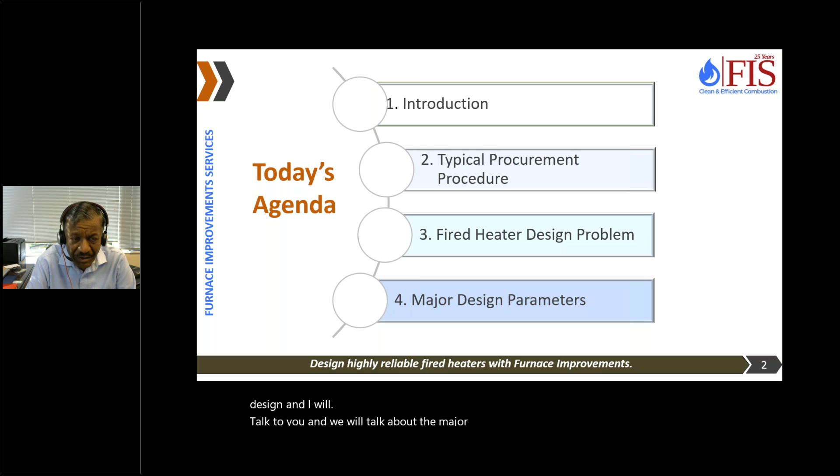So what are we going to be doing today is talk a little bit about introduction, talk about typical heater procurement procedure, and then we will talk about a real fired heater design problem. We will take a real fired heater design, and I will talk to you about the major design parameters, and then we will move ahead with that design, how we come up with the design of the heater.

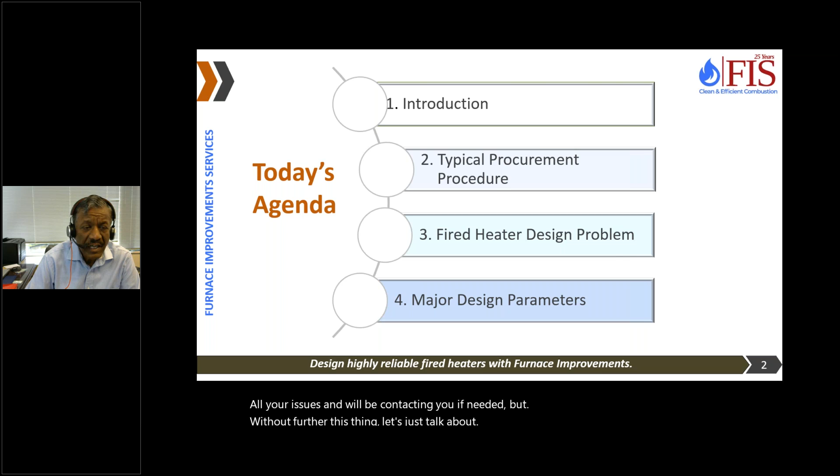Without further delay, let's just talk about how the heaters are being procured today in most part of US and the world. So typically, when you have a project, most of the projects are carried out by big EPCs, engineering companies, and they sometimes hire licensors, and they come out with a front-end engineering design package, feed, typically, as it is known in the industry. And that is given to the EPC, the successful EPC, and they are asked to develop a plus minus 10% cost estimate.

So the EPCs take the data sheets which are developed by the licensors or the client, or by EPC themselves, and they go out to the heater vendors and get the preliminary cost estimates. And these cost estimates are then taken by the EPCs to develop the project estimate. And once the project is approved, EPCs take those proposals, firm up their inquiries, and send the firm inquiries back to the heater vendors.

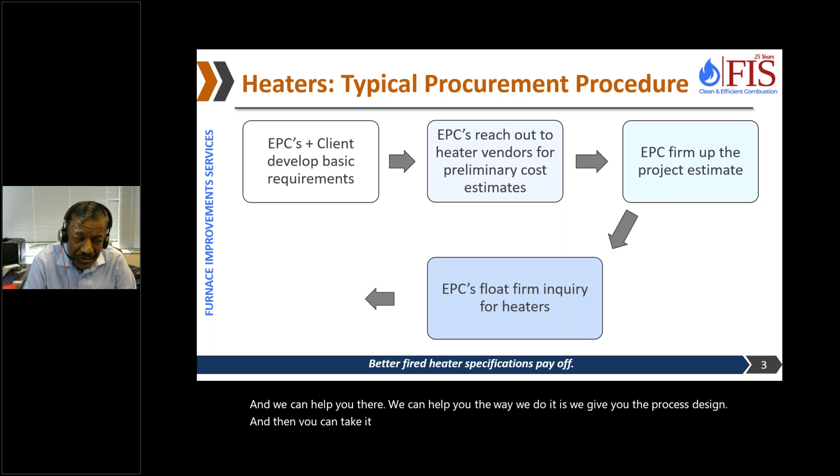So our approach is get the design right the first time. Do it once, do it right. That's our approach. And we can help you there. The way we do it is we give you the process design, and then you can take it to any EPC or any heater company, and it will ensure that you don't get a cheap heater. You get the best heater for your money actually.

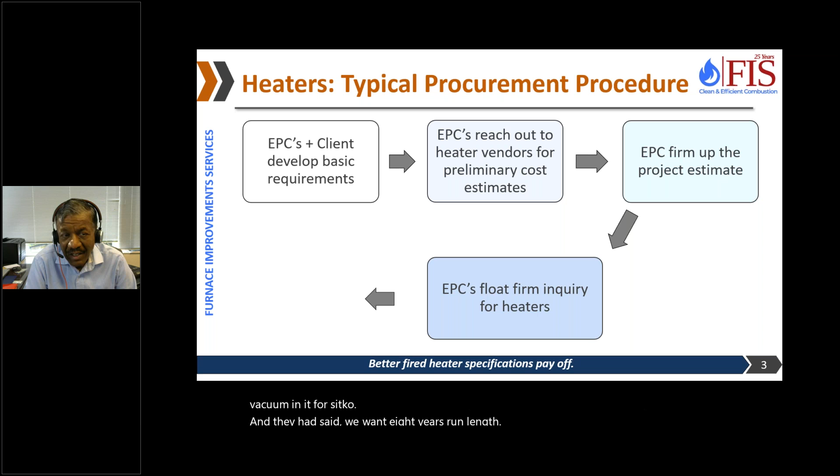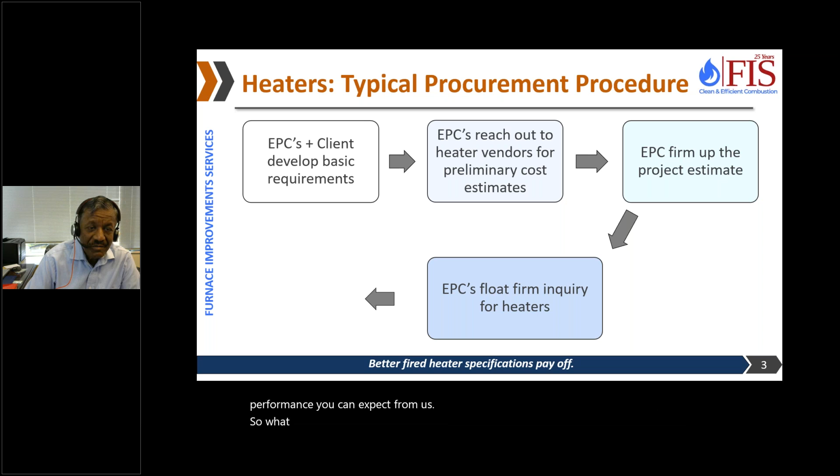We did a design for crude and vacuum unit for Citgo, and they had said we want 8 years run length, and we were able to show them that the heaters ran for 8 years. So that's the type of performance you can expect from us. So what I feel is the procurement procedure needs improvement, and that's where we come in.

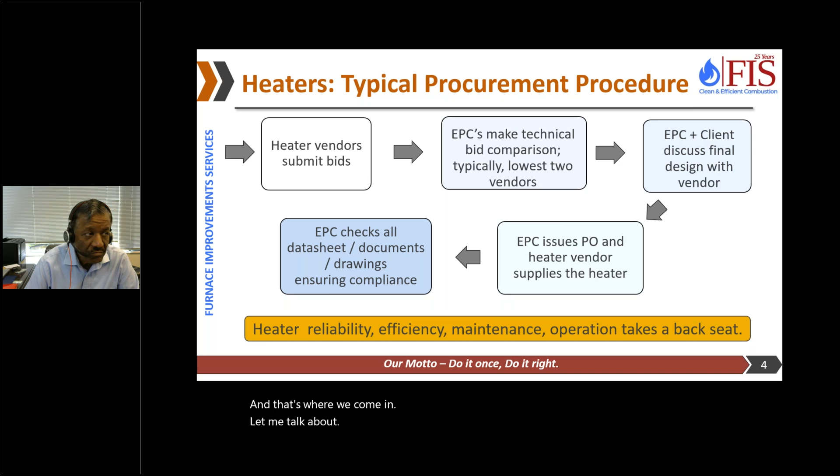So let me talk about our company, Furnace Improvements. We started in 1996. We have two offices, Sugarland, Texas, and then we have a main office in Noida. Now, basically, the main office is where all the activities are taken care of. Our mission has been improving the performance of existing fired heaters. That's what we do for living. Basically, take your heater, improve their run length, improve the capacity, improve the efficiency, reduce emissions.

And our model has been working directly with end users and owners, as we call it. It's a model which is like a patient-doctor's relationship. We look at the patient and then we prescribe the medicine. And we have a very unique value-added approach, and it is somewhat based on a contrarian approach.

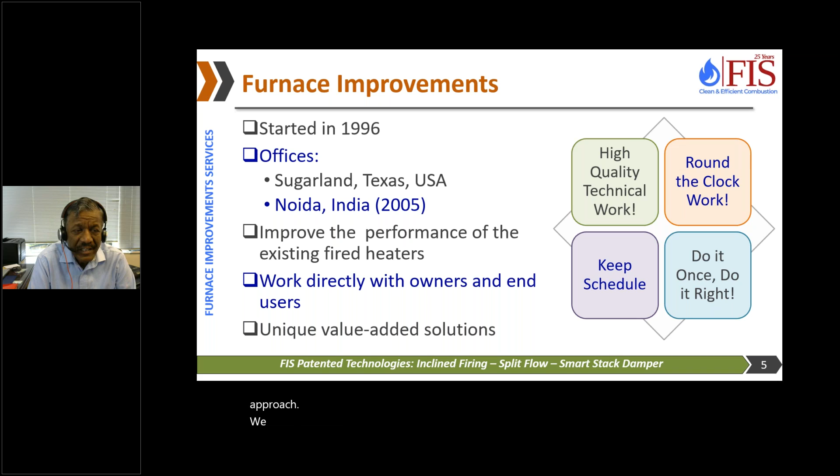We challenge what has been done and why it has been done. So we have a kind of getting back to the basics and looking at the heater. If you give us a heater, we will look at the basics and see what has gone wrong in that heater. And on that basis we have developed 3 patented technologies: inclined firing, split flow, and smart stack damper.

So that's basically our approach to fired heaters. And as I said, our approach is do it once, do it right. Because of time difference, we are able to do work around the clock, and we are able to keep schedules. We can do work schedules very, very fast.

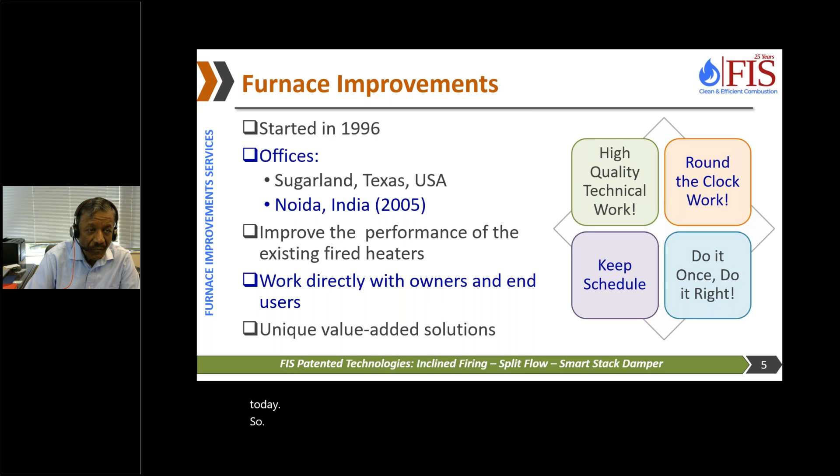As far as our capabilities are concerned, our forte is process engineering. We have in-house CFD modeling capabilities. I think maybe we are the only heater company with in-house CFD modeling capability. We do our mechanical engineering, structural design. We have SolidWorks for 3D modeling, and we can do your project from start to finish, all the way from design to erection. We can take the project.

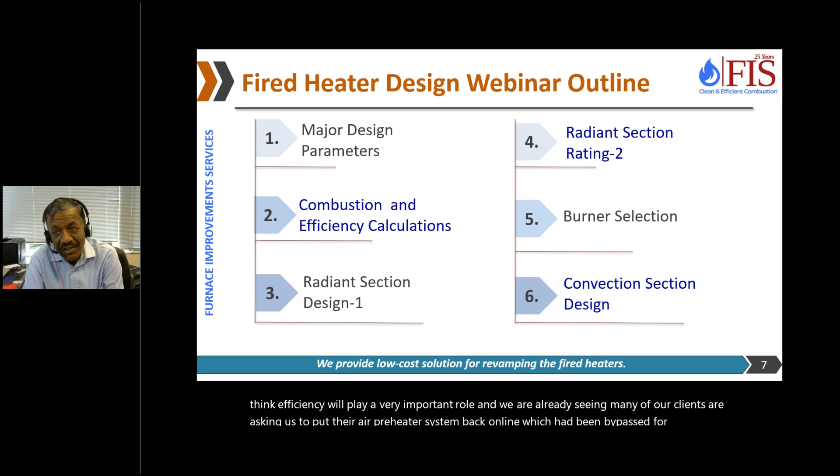Then in the third and fourth sessions, we will talk about the radiant section. We realized the radiant section is the key to fired heater design, or the major component in the fired heater. So we will take 2 sessions doing that.

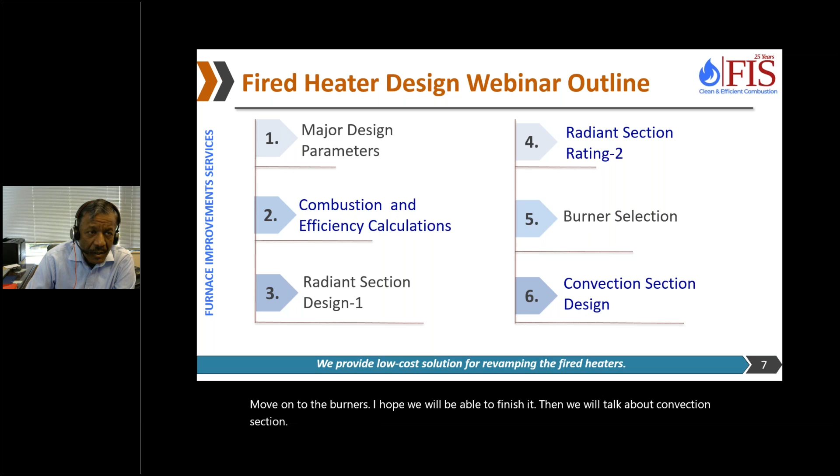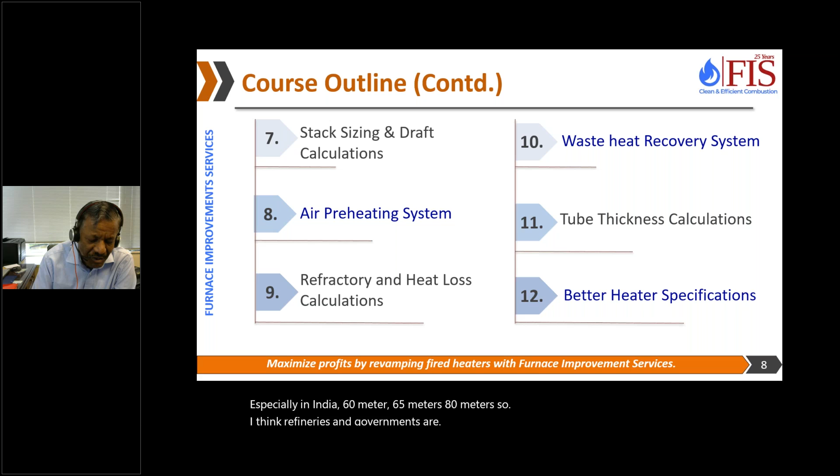Move on to the burners. I hope we will be able to finish it. Then we will talk about the convection section. Move on to stack sizing and draft calculation for stacks. We are seeing taller and taller stacks, especially in India, 60 meters, 65 meters, 80 meters. So I think refineries and governments are taking cognizance of pollution, and that's a good thing. The taller the stack, the lower will be the ground level concentration.

Air preheating systems are going to make a big comeback because that's one of the most effective ways of improving efficiency. So we will talk about air preheating systems. We will talk about refractory and heat loss calculations. We'll talk about waste heat recovery systems, also like steam generation and tube thickness calculations.

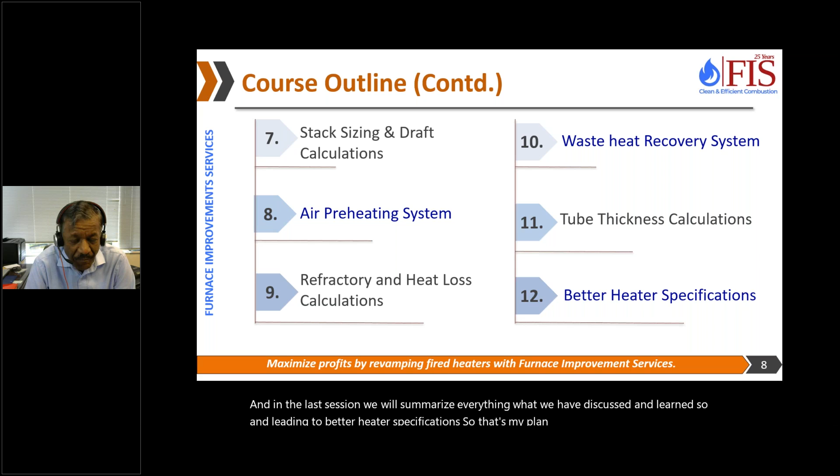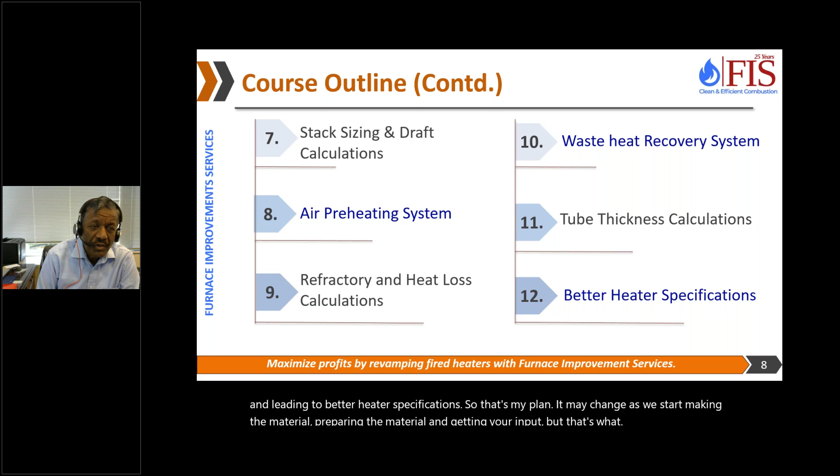And in the last session, we will summarize everything we have discussed and learned, leading to better heater specifications. So that's my plan. Actually, it may change as we start preparing the material and getting your input. But that's how we want to conduct this webinar. I want this webinar to be tailored to your needs. So if you need anything, if you want me to clarify anything, please feel free.

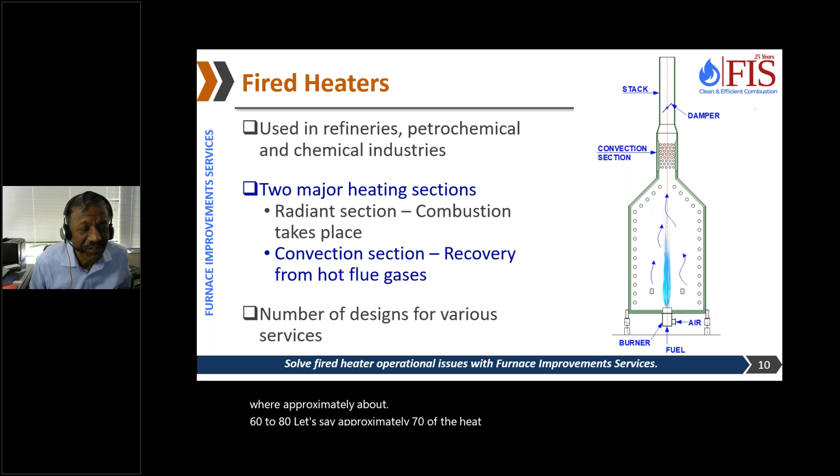Fired heaters have two major heat transfer sections, which we will talk about in a lot more detail. The radiant section is a major heat transfer section where approximately 60 to 80%, let's say 70%, of the heat transfer takes place, and 30% of the heat transfer takes place in the convection section. These are the two major areas where heat transfer takes place. And there are numbers and numbers of designs available, which we will all cover as we go on.

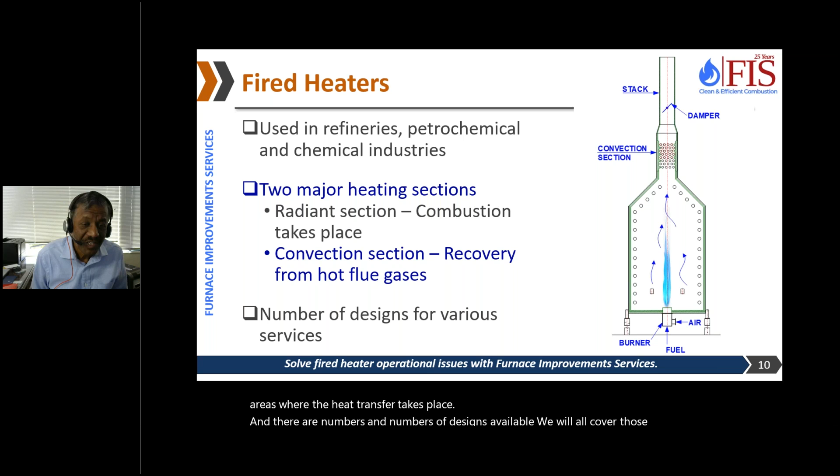Let's talk about major components in fired heaters. API says there are 21 components, and our team has shown a lot of them here. But as I said, the radiant section, convection section, and the stack - these are the three major components. Then the burners, most important component from the operation or process engineer standpoint, even though burners only cost 3 to 5% of the total heater cost, which is basically negligible. But in terms of operation, burners and stack dampers are two very important components in a fired heater.

Here in this picture we are showing a horizontal tube cabin heater and a vertical cylindrical heater. We will talk more about it a little bit later in the presentation.

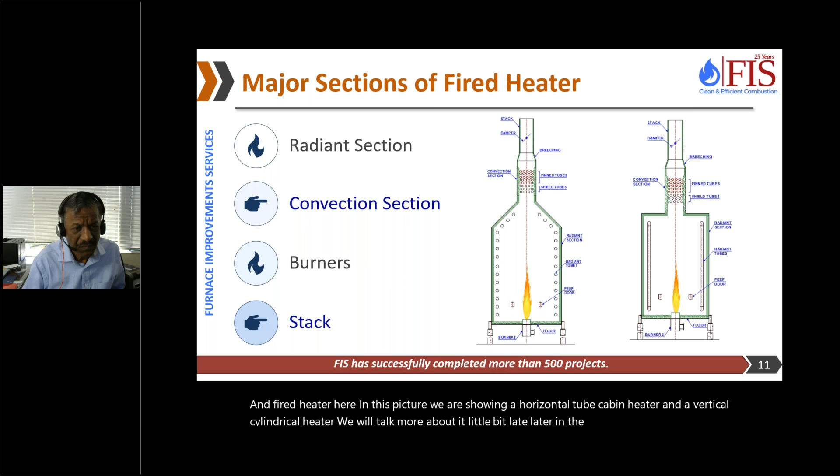So let's talk about types of heating, what type of heating we are looking at. Most of the time in fired heaters, we either have fluids which are hydrocarbons or steam - there could be other things, but mostly hydrocarbons or steam - and these fluids could be in liquid phase or gaseous phase. So there are two types of heaters: one where there is no phase change taking place, meaning liquid going in and liquid coming out, or vapor going in and vapor coming out. The example of liquid in, liquid out is a hot oil heater. Vapor in, vapor out, we can talk about catalytic reformer heaters.

Most heaters in the refining industry are of reboiler nature, meaning liquid going in, liquid plus vapor coming out. Examples are plenty: crude heater, vacuum heater, many hydrocracker heaters - tons and tons of heaters. The third type of heating, which I'm not talking about here, is where there is heating and reaction taking place - an endothermic reaction, and the heat is used for carrying out that reaction. Steam methane reformers, cracking heaters for making ethylene, and to some extent maybe coker heaters fall in that category. But most of the time we're talking of simple heaters, and that's the classification as far as we're concerned.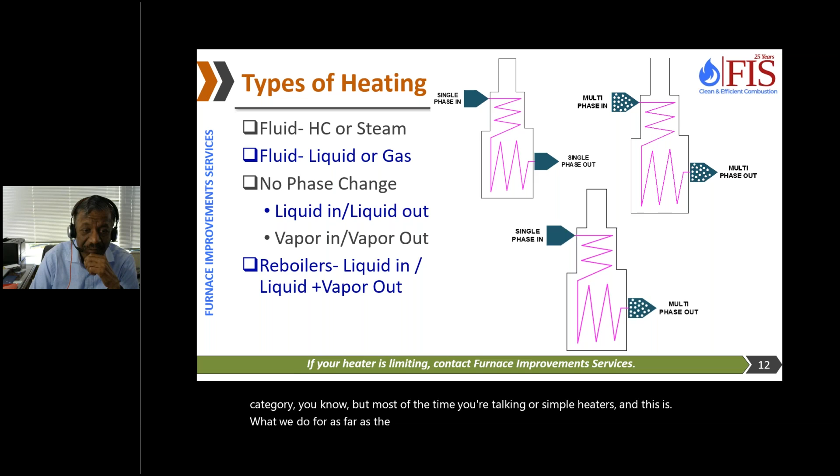Let's talk about how fired heaters are designed. Fired heaters are always custom designed, and each one is tailor-made to meet the customer's requirement, site requirement, process requirement. So there are so many things - very rarely will you see a repeat of fired heaters.

I want to tell you, about 30 years ago I used to work for a heater company, and they got an order from Mexico for 2 heaters. We thought we would be able to provide identical equipment.

Once we received the data sheets, it turned out that one of the heaters was to be located in Tula, Mexico, at about 6,000 feet elevation. The other was at sea level. So just the elevation of the site makes a big difference in the heater design. Even though they both had the same parameters, the heat duty and everything else, same fuel, same type of fuel, their design was different.

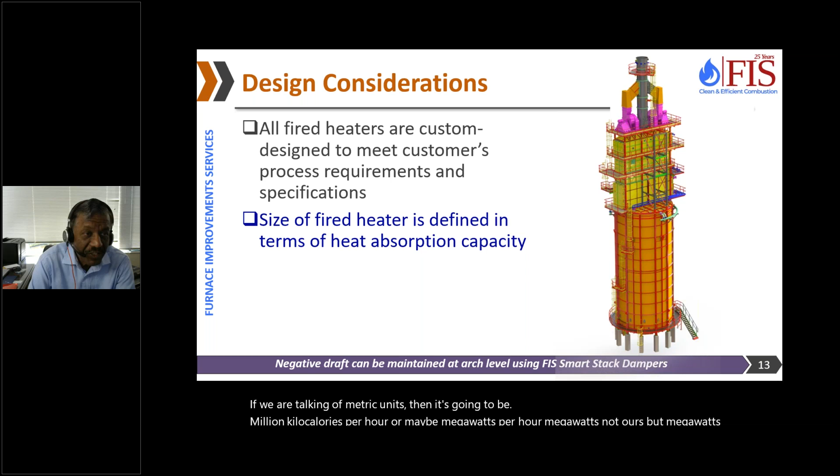So let's talk about the most important parameter for fired heaters. Most heaters are defined in terms of heat absorption capacity. We measure heat absorption in million BTUs per hour. If we're talking metric units, then it's million kilocalories per hour, or maybe megawatts. So these are some of the units used for heat duty.

So let's talk about the first parameter we need to know, and how much heat duty is being transferred. The duty is generally specified by process engineers. Now, the heater could be supplying heat for a reaction, so start of run will be different and end of run will be different, at the catalyst.

Similarly, if we have a preheat exchanger train upstream of the heater, there also start of run may be different. When the exchanger train is clean, it will be preheating more. When it's fouled, it will be lower inlet temperature. So when you're specifying the heat duty, you need to think about how much margin to keep, because you're not going to be building fired heaters every 5-7 years. Most fired heaters are built for 50 years. Even though technically the life is 20 years, there are heaters which are 50, 60, 70 years old still operating.

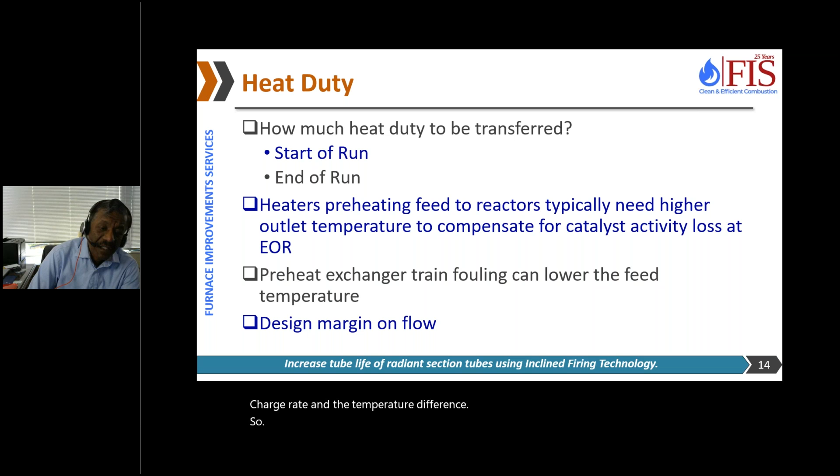So let's talk about the sample problem. This is a real life problem, an actual project which we did about 5 years ago, and I took it in as a sample problem. It's a little bit complicated heater, so we'll try to cover as many things as possible on this.

So look at the heat duty. The heat duty specified by the EPC company was design of 126 million BTUs an hour. Normal was around 94, and turn down is about 33 million BTU per hour. So you can see there was a margin of almost 30 million BTUs, or almost 33%.

And this heater is a hot oil heater. Hot oil heater is a utility, almost like a steam boiler. So you want to keep adequate margin so that any time you expand your plant, put up another unit, you can still live with the same hot oil heater. You don't have to put a new one.

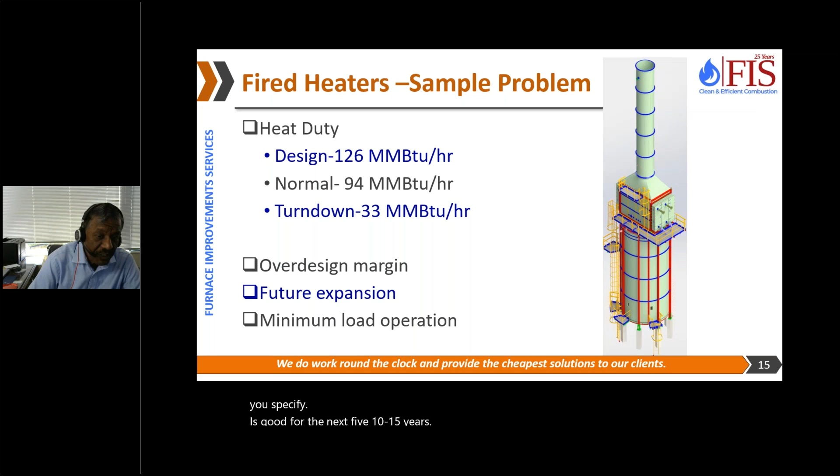All right, so we covered the most important parameter, which is the duty. Let us talk about the fluid which is being heated. What type of fluid is it? Is it liquid? Is it gas? Is it hydrocarbon? What is the composition of this fluid? Generally, if it's a hydrocarbon, we talk about degree API or specific gravity, which defines the fluid.

Also, sometimes, does it have any corrosion characteristics? Does it have any naphthenic acid in the crude? What could be the cracking and coking tendencies? Is there going to be a fouling factor? Does it require special material of construction? All these things will play a role in the fired heater design.

So the better prepared you are, the better will be the heater design. If you know everything, you'll be able to give it to the heater vendor, and then you'll be able to communicate to them and get a better heater.

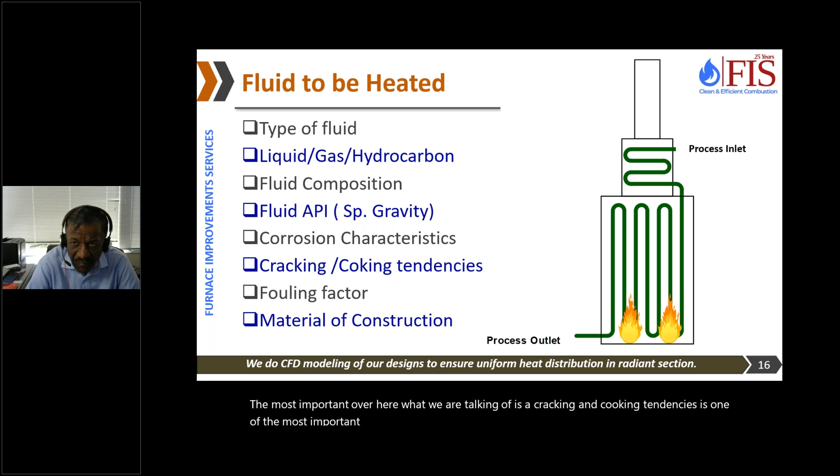The most important thing we are talking of is the cracking and coking tendencies - that is one of the most important parameters. So, feed characteristics.

If you have a vaporizing service, typically most EPCs will give you the TBP data, or specify true boiling point data or ASTM distillation data like D86 or D2887, or they can give you the property grade, vaporization, temperature, enthalpy, and a lot of times they may even specify feed contaminants, whether we have naphthenic acid, water, salt, sulfur, hydrogen. Hydrogen also defines the material of construction. So these are some of the parameters you need to specify.

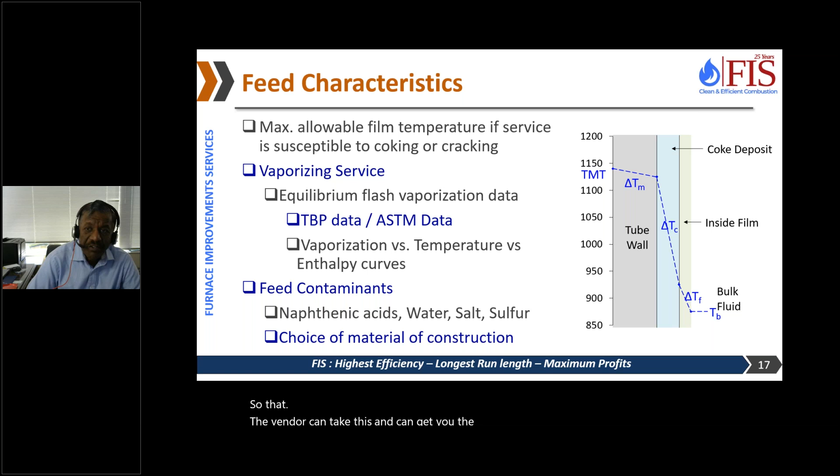So that the vendor can take this and get you the best heater possible. In our case, the fluid specified by the EPC or the end user was Therminol 66. It's a hot oil heater, as I said.

And they gave us a film temperature limit of 695. Here we give you a formula for film temperature. Film temperature is a very important parameter in hydrocarbons. For hot oil, film temperature is important because it controls the cracking rate, and hot oils are generally very expensive. So if they crack over a period of time, maybe in 2 years, you have to change the complete hot oil stock in the system. So, very, very important parameter. The second is...

The industry practice is that every 26-degree increase in the film temperature of your crude, vacuum, or coker heater doubles your coking rate. That's typically the industry practice. So if your film temperature goes up by 26 degrees, you can assume your coking rate has doubled. If it goes up by 52 degrees, it has gone up by 4 times. So film temperature, in all our calculations, plays a very, very important role in our heater design.

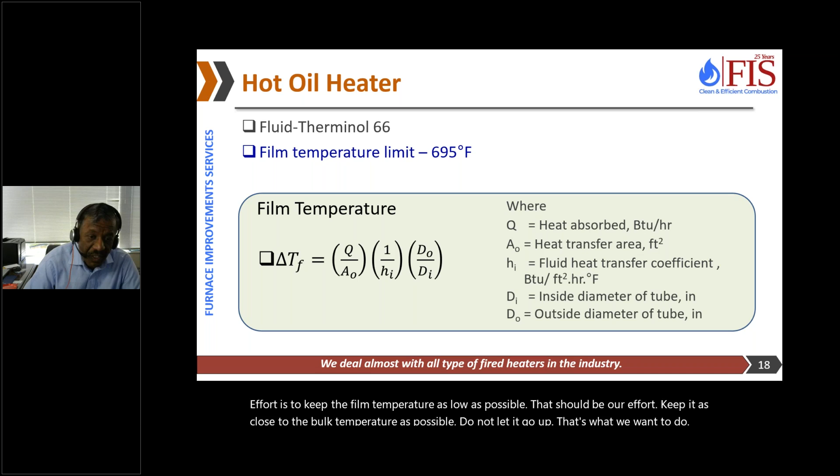Our effort is to keep the film temperature as low as possible. That should be our effort - keep it as close to the bulk temperature as possible. Do not let it go up. That's what we want to do. We will tell you how to achieve it. We'll cover it. So the next thing is...

If you're designing a fired heater, we need to know the fluid properties. What is the fluid flow rate? What is the inlet temperature, outlet temperature, vaporization in and out, pressure in and out, and then the physical properties: fluid density, specific heat, viscosity, thermal conductivity, and if you have a two-phase flow, we need fluid surface tension for calculating flow regimes, two-phase flow regime. So these are the properties.

So you can see we need a lot of data from you to get the best heater, and the more data you give us, the better heater you will get. I always tell my clients that we like vigilant clients, clients who interact with us all the time. Clients who give us full freedom - we are afraid sometimes because we are not able to communicate with them. We like them because they give us full freedom, but we are always treading with caution, making sure that we keep them informed and do what they have expected us to do.

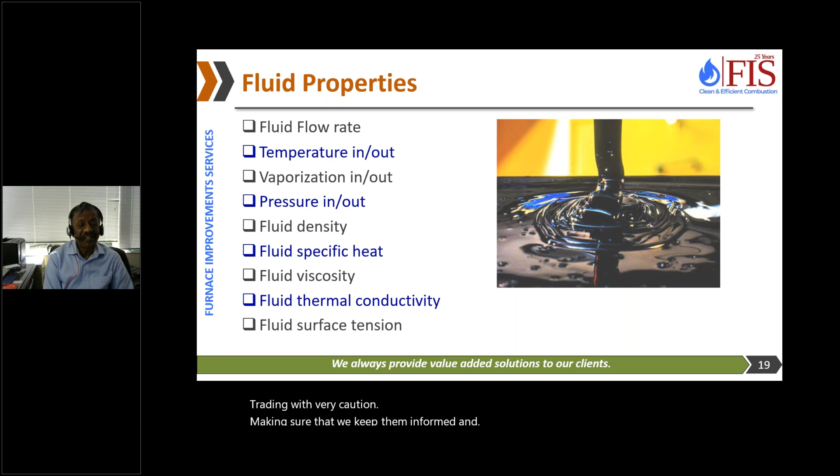So let's talk about the sample problem. In this case, this is a hot oil heater. They gave us a flow rate of 1.8 million pounds an hour, pressure 120 to 80, temperature in 480, out 600, density, viscosity. I apologize to all my friends from India and other places because we are talking of British units. I've been dealing with British units for almost 30 years now, so I cannot follow the metric units. I apologize, but my team can give the British units or the metric units next time. But it really does not make much difference - this is basically what we will be using in our problem.

You'll see that each parameter is important, whether it is viscosity, thermal conductivity, specific heat - all these.

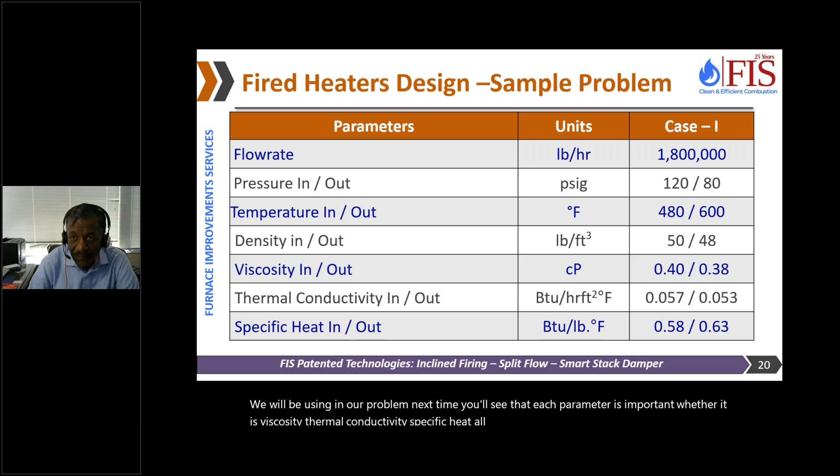One of the most important things is the plot area, because heaters are big equipment - you need a lot of space. There are two common designs: vertical design and horizontal tube configuration design. You need to think about tube removal area, especially if it's a horizontal tube design. If the tube length is, let's say, 40 feet, you need another 40 feet of clearance in front of the heater to be able to remove the tube. So you effectively need 80 feet of plot area.

In case of vertical cylindrical heater, the situation is a little different because you can go up in the sky. So a vertical cylindrical heater requires lower space requirements, but it still needs access for a crane. You need a crane to remove the tubes vertically, and sometimes after 60, 70 feet, the crane becomes very, very big, so the advantage of the VC heater is lost.

For the air preheating system, typically whatever space you need for the fired heater, you can double it, or even triple it. If you want to put an air preheating system, you need triple the space of the heater. So this is all you have to think about.

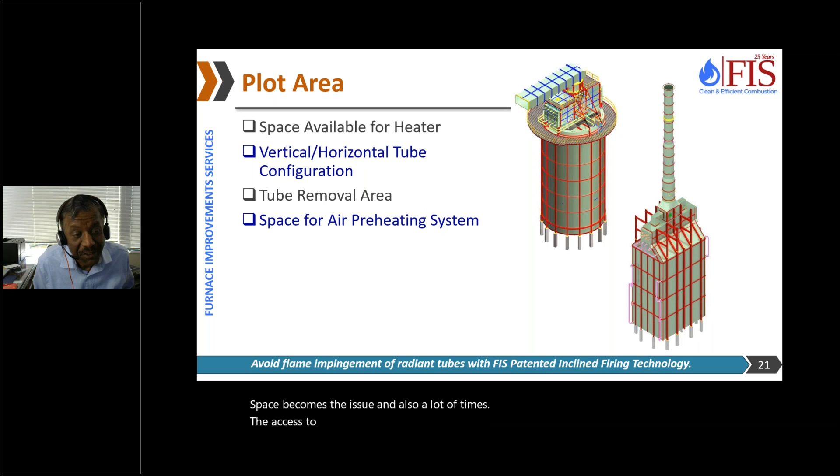If you're doing a new refinery, the chances are space will not be a constraint. But if you are working in a US refinery, where the refinery has been there for 30 years, and you want to put a new heater or a new unit, space becomes a big issue because the plot space is limited. Space becomes an issue, and also a lot of times the access to the space becomes an issue. How will you access it? If there is a pipe rack on the road, how will you take it through?

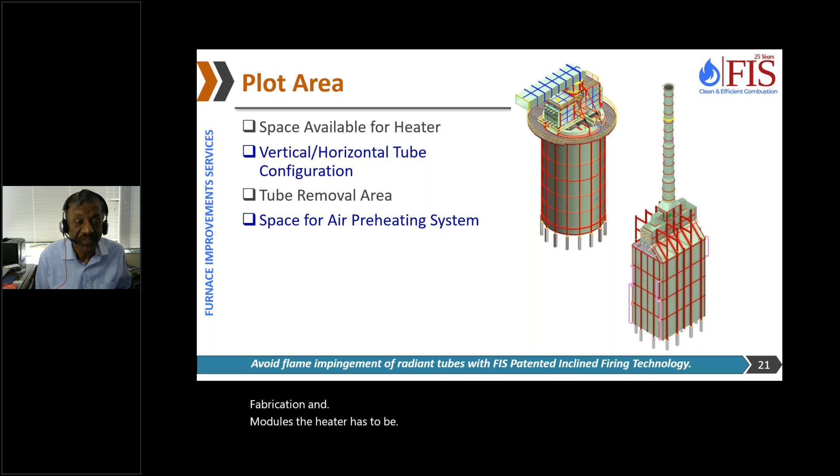Fabrication and modules - the heater has to be fabricated in modules or panels, so there are lots of things which we have to take into account.

We'll talk about fired heater classifications. We have a lot of different types of fired heaters. They can be classified in 4 different ways: firebox, radiant coil, firing, and draft.

In terms of firebox, the major classifications are cylindrical, box, cabin, and multi-cell. When we talk about radiant coil configuration, we are talking of vertical tubes or horizontal tubes - those are the 2 major layouts we use for radiant coils. For small heaters, a lot of times we go for helical, and for catalytic reforming units, which is a very special heater, we go with an arbor design of radiant coils.

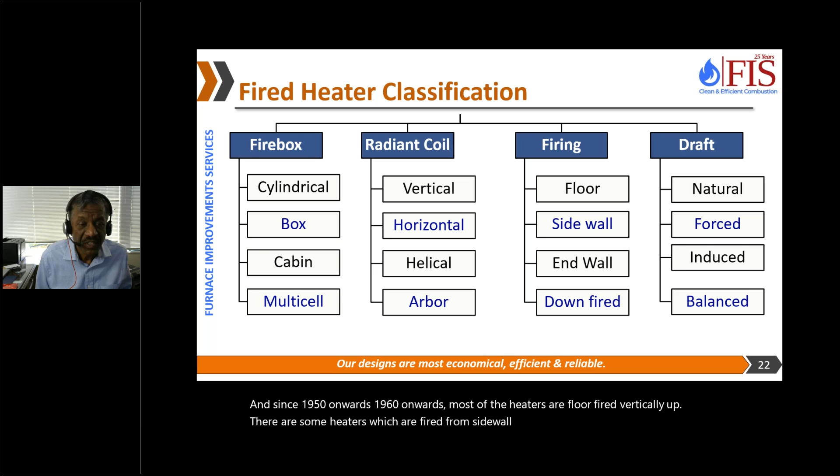Firing pattern: historically, prior to the 1950s, all the heaters used to be end wall fired. Since the 1950s, 1960s onwards, most heaters are floor fired, vertically up. There are some heaters which are fired from the sidewall - special heaters. And then there are special heaters like steam methane reformers, which are fired from the top. They are called down-fired heaters.

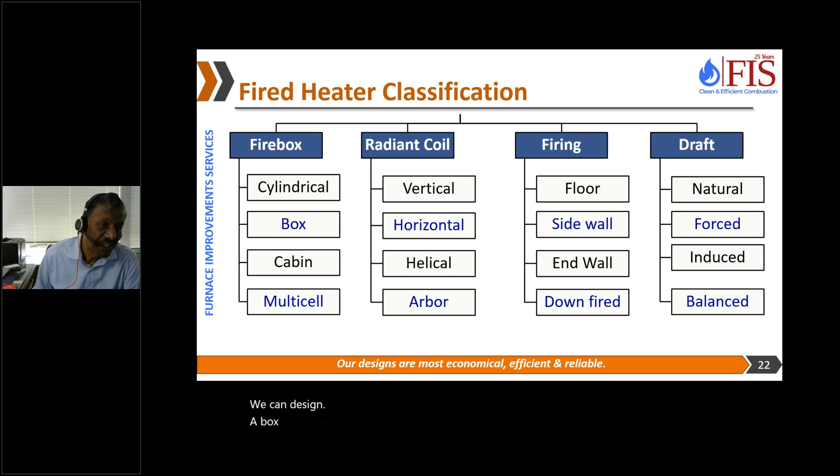Then we have natural draft, forced draft, induced draft, and balanced draft. Natural draft does not have any fans. Forced draft has an FD fan. Induced draft has an ID fan, and balanced draft generally will have both FD and ID fans. 95% of the time, it will also have an air preheating system. So you can see we have a lot of choices available for design - we can design a box heater, we can design a cylindrical heater, we can have floor firing, we can have balanced draft. So a lot of options are available to us.

I want to talk about 2 heaters very briefly - the features of the vertical cylindrical heater. It's the most popular heater these days. It has a low plot space requirement and an economical design - it's about 15 to 20% cheaper than a comparable horizontal tube cabin heater.

We can have any number of passes. The convection section is very compact. We can install few burners - a very popular design. Tube length generally around 60-65 feet, even though I think API has now allowed up to 70 or 75 feet, but that's generally the upper limit. But again, a very popular design.

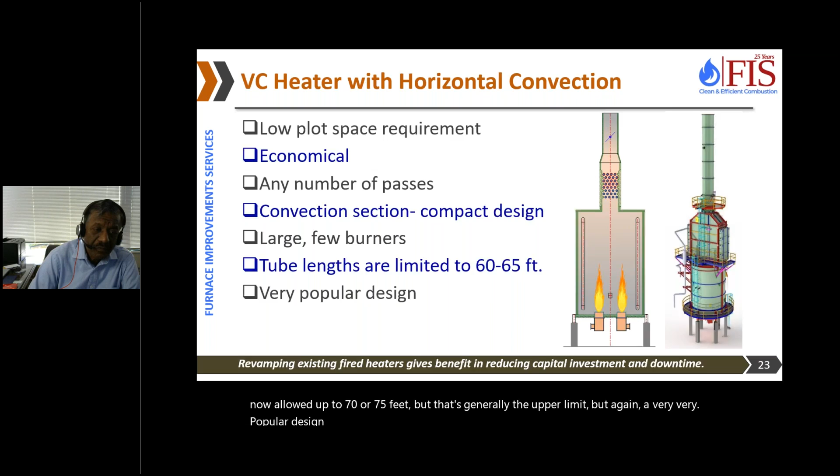Let's talk about the cabin heater or box heater. Generally most of these heaters will be having floor firing, but some old designs used to have wall firing. Tubes are on the 2 sides of the walls and on the roof. It's economical, and for some critical services like cokers, and sometimes even for crude and vacuum heaters, a lot of people prefer horizontal tube heaters for better flow regimes or identifiable flow regimes. But they are a little more expensive and require more space - so that's the only thing, you have to pay a little more.

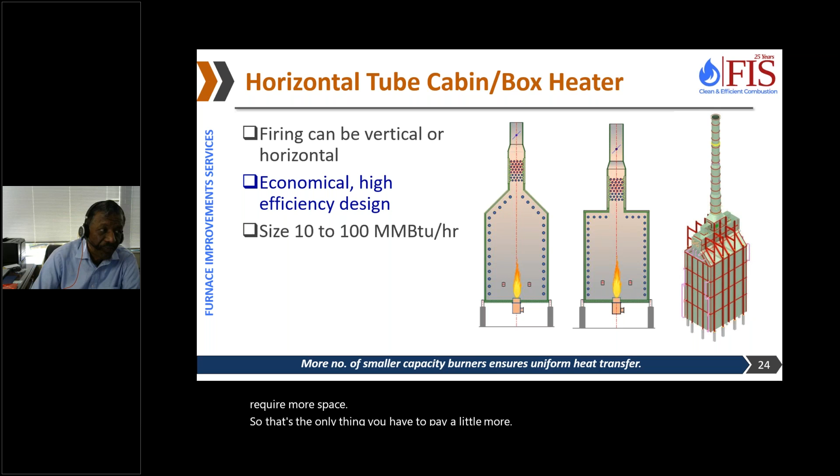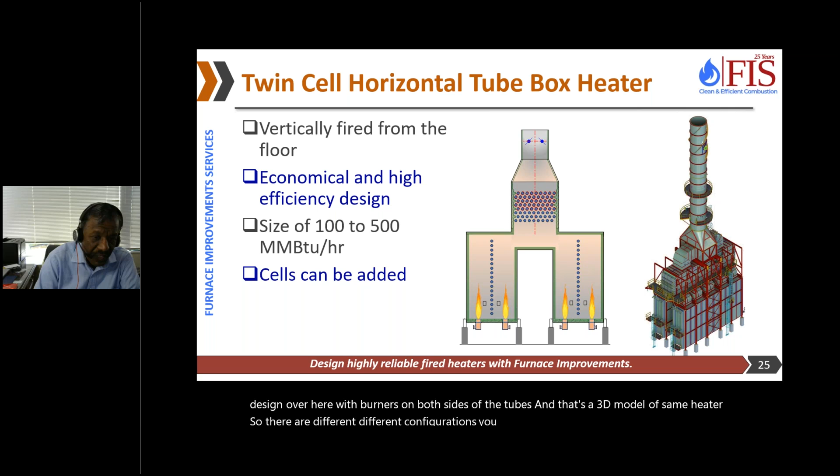The twin cell heater basically is an extension of a single box to a twin box, and sometimes you can even have 3 boxes or 4 boxes. This one is a kind of special heater which we are showing you - a double fired design with burners on both sides of the tubes. And that's a 3D model of the same heater. So there are different configurations, and we'll try to cover some of them - advantages and disadvantages of all these things.

Two major configurations - horizontal coil and vertical coil - you can see over here.

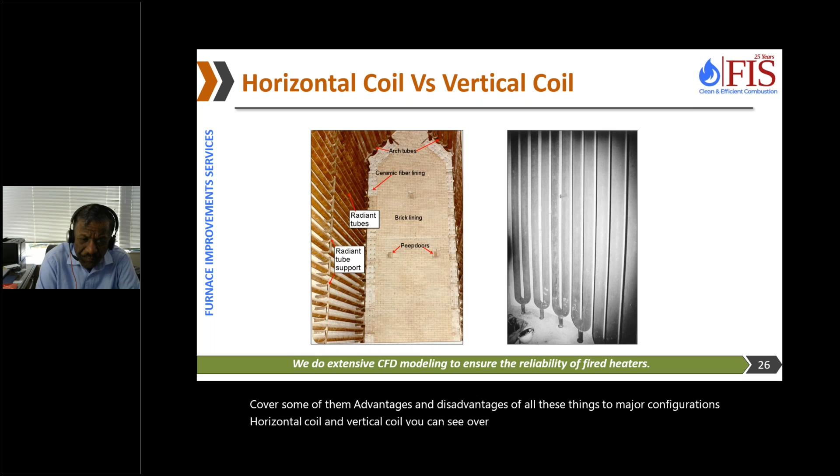So getting back to our heater, the client said, I only have 80 feet by 50 feet for this heater. So that became a major parameter as to what can be accommodated in that space. I will talk about how we were able to come up with an innovative design of a hot oil heater.

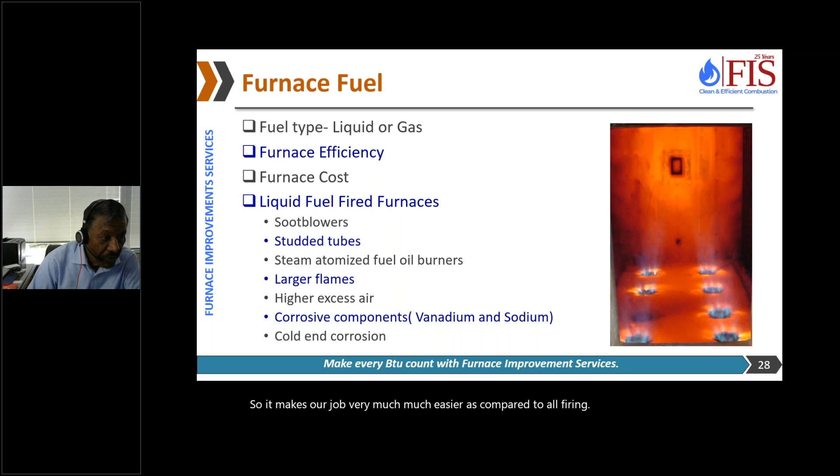So let's continue, we have 5 more minutes. I think I will just stop after the fuel. I'm running a little behind my course, but we will cover it in the next session.

Fuel properties: if you are firing fuel gas, you need to know the composition of the fuel, how much methane, ethane, propane is there. You need to know the heating value, the pressure and temperature the fuel gas is available at, and whether it has any sulfur compounds. This is a very important component.

And if you are firing fuel oil, you again need to know composition, degree API or specific gravity, C by H ratio, sulfur inerts, sodium vanadium content, pressure and temperature, and viscosity. So these are some of the parameters we need to know.

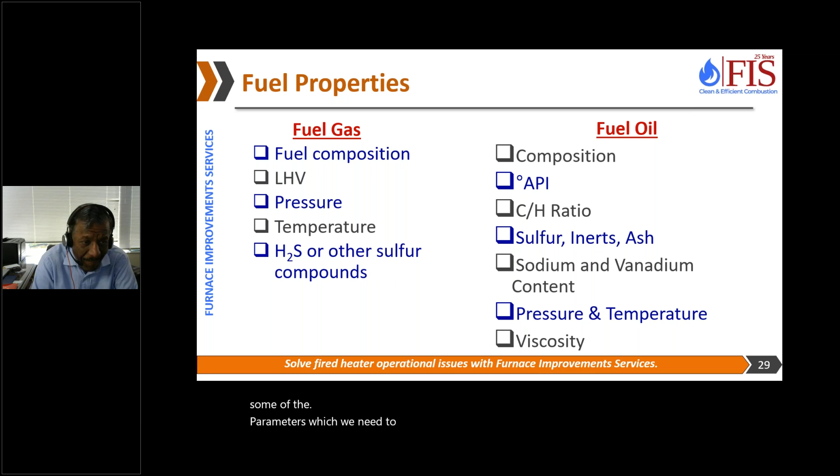But fuel is a very important component, it's one of the things that defines fired heaters. We are burning fuel to generate energy, and that energy is getting transferred into heat fluids, or heat transfer.